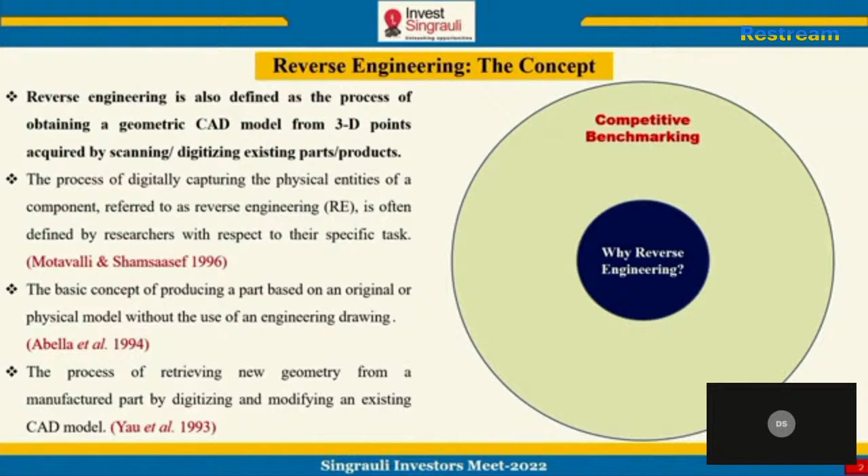So basically why we require reverse engineering? For competitive benchmarking, for a product in the market, we can provide a low-cost product in the competitive world. For smart manufacturing, which is a need of an hour - IoT-based, artificial intelligence-based manufacturing - we can use reverse engineering to achieve this smart manufacturing. Then, as all of us know, reverse engineering is for obsolete part development, design development. If the part does not exist, we can develop the design of that part if it is in front of us. Then documentation, this is very important.

I'll come to it later on also when I'll discuss the prospects of reverse engineering - design documentation. Then it can also be used for characterization of the samples. It can also be used for inspection as well as quality control. In fact, in automotive industries, people are using it largely for these activities. For product improvement, in the existing design, we can make improvement using reverse engineering.

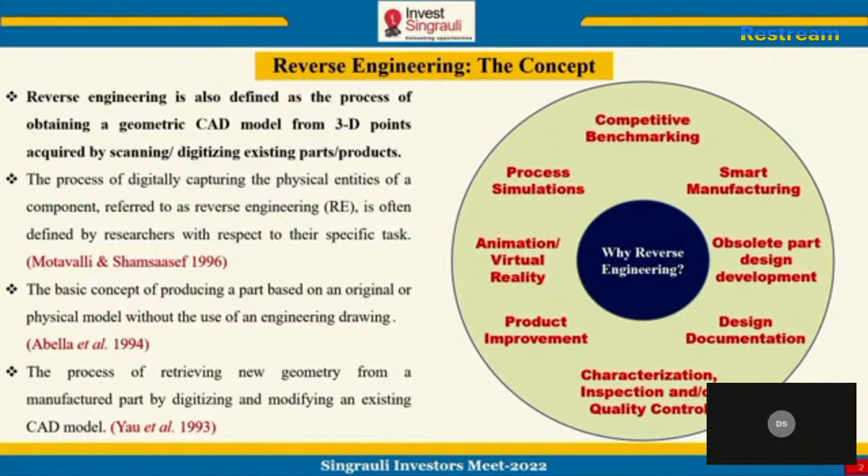For animation and virtual reality, we can use the reverse engineering designs to create the simulated environment for our engineering purposes. Like for example, in coal fields, we can develop a simulated environment of a whole coal field using reverse engineering, and we can identify the bottlenecks that we might face in the real situation. Then process simulation, like in case of biomedical industries, for a surgery, which is a very complicated task, we can use reverse engineering to simulate the complete surgery before even we perform it on a real patient. So this is where reverse engineering can help us.

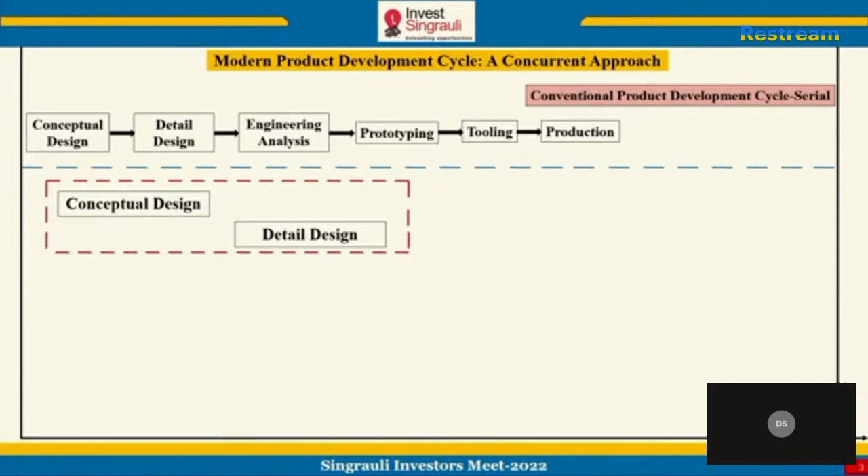So now what is the current scenario? The conventional product development cycle that we follow initiates with conceptual design. It is a serial type of thing - design, then prototyping, then manufacturing, and then if some failure occurs, we again go to conceptual designing. This no longer exists now. People are moving forward, way ahead. That is rapid product development - that means all the things that exist in the serial production cycle have to be done simultaneously or parallelly. This is known as rapid product development.

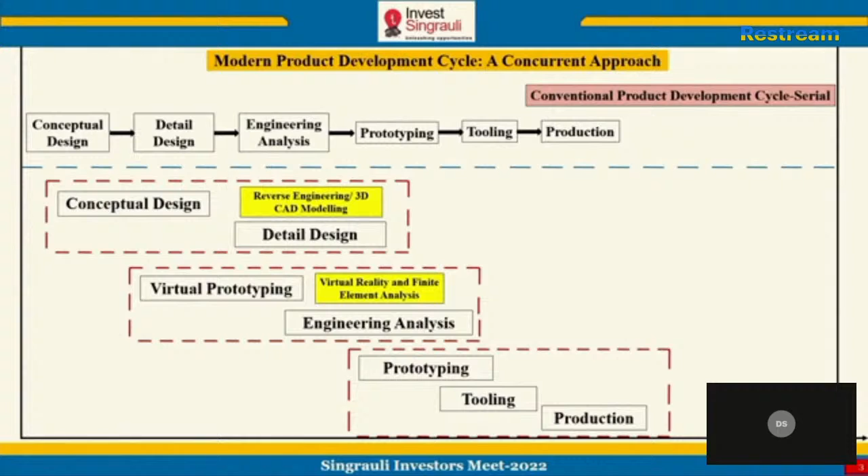So we can do designing and simultaneously we can also think of manufacturing, like using additive manufacturing technologies or 3D printers. So we can see what are the problems and identify those problems, and it results in time saving. Basically the path of product cycle using reverse engineering - as I've told you, this is the conventional way we are doing till date. Concept, then we go for manufacturing, then testing of the part, then real time testing, then results, and if the results are not as per our standards, we again go to the design phase. So it's a very time consuming task. It takes a lot of time and money is invested in this.

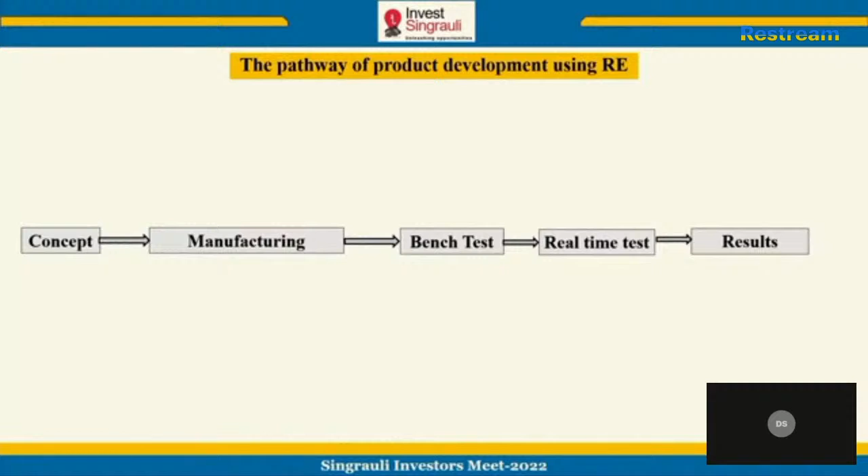To overcome this problem, reverse engineering can play a significant role. How? From the concept itself, we can go for simulation of the process. Instead of manufacturing, we can simulate the process, optimize the design, identify and analyze the results, and then we go for design loop before manufacturing.

So we are no longer spending any amount in manufacturing. Manufacturing cost is very high, and then we go for manufacturing, so the chances of failure of a product is very, very less.

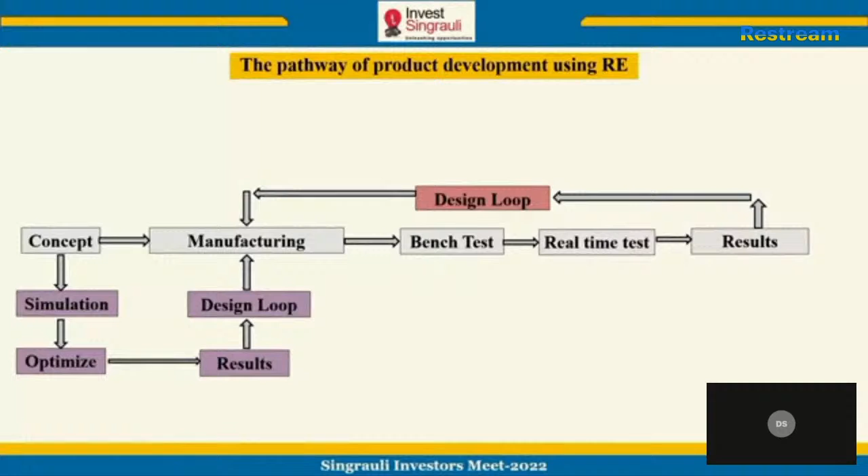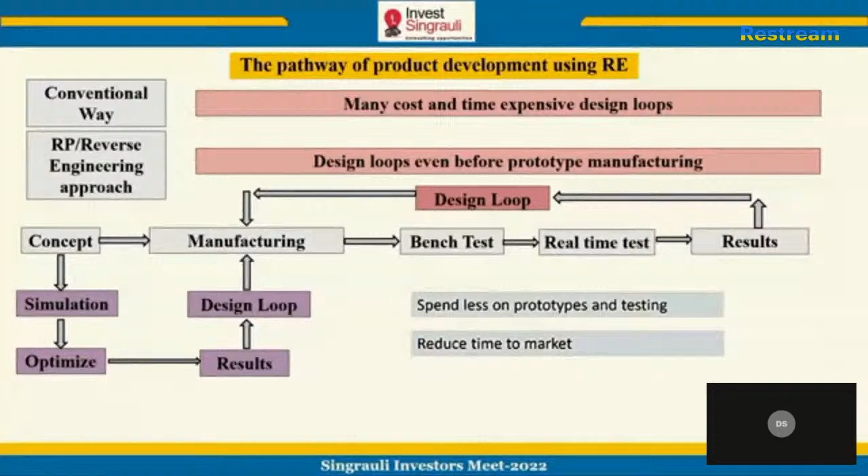So conventionally, many cost and time expensive design loops are there. In fact, in rapid prototyping or reverse engineering method, the design loops exist even before manufacturing happens. So it results in cost saving as well as time savings.

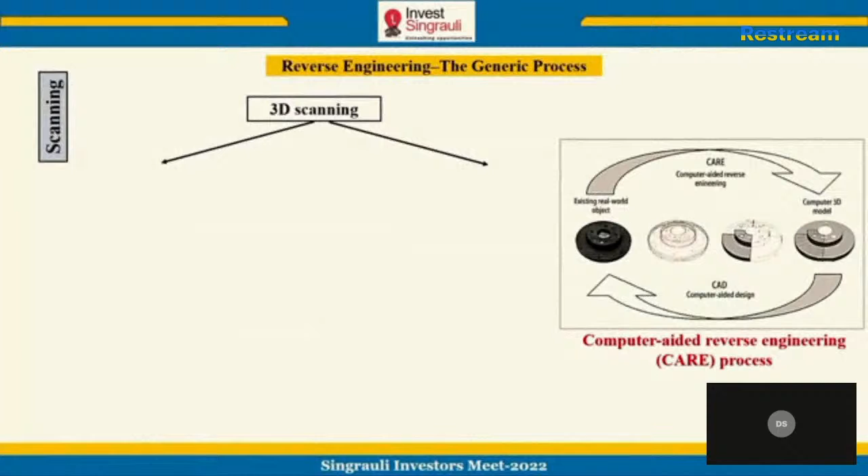Basically, I'll showcase this with the help of this slide. What is the generic process of reverse engineering? It initiates with scanning of a product. If the product is in front of me, I will scan it, like I will scan my whole body. It is possible - there are startups in India who do reverse engineering for artifacts also.

So I can reverse engineer, I can scan my body, and then I can develop the point cloud data using reverse 3D scanning or whatever methodology I can use. So I can develop point cloud data, I can process that point cloud data. The data can be in the point cloud form or it can be in the form of scans.

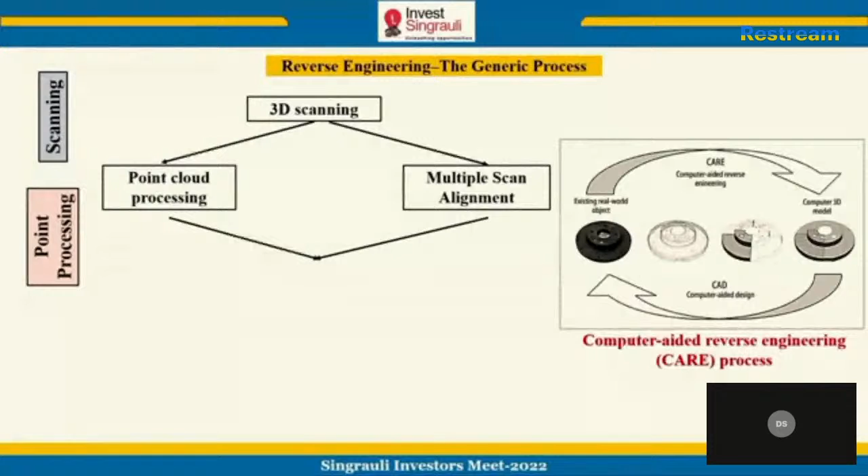We all have seen X-ray images in our life. That X-ray image is nothing but a single slice. In reverse engineering, we have multiple numbers of those X-rays, stitched together. The model is developed using a number of algorithms, so a computer science engineer is required here.

So we use the triangulation problem to develop our STL model, develop CAD-based surfaces like B-spline curves or non-uniform B-spline curves, or we can go for direct 3D printing, as well as use these for inspection also. So this is the basic generic flow cycle of a reverse engineering process.

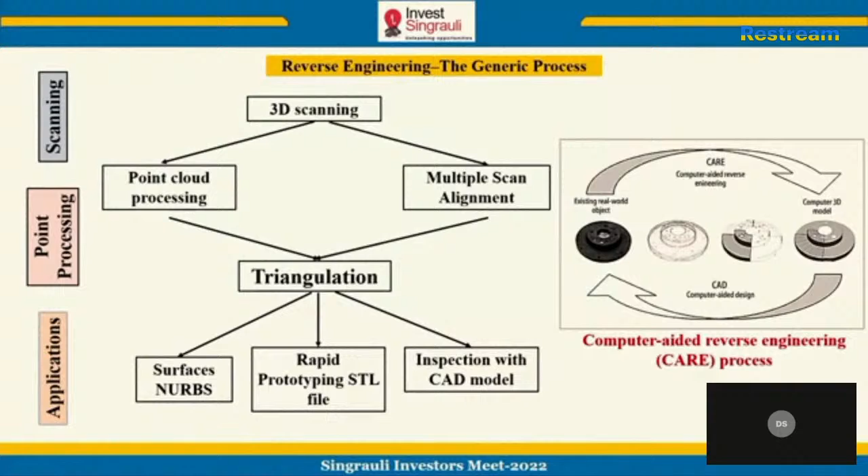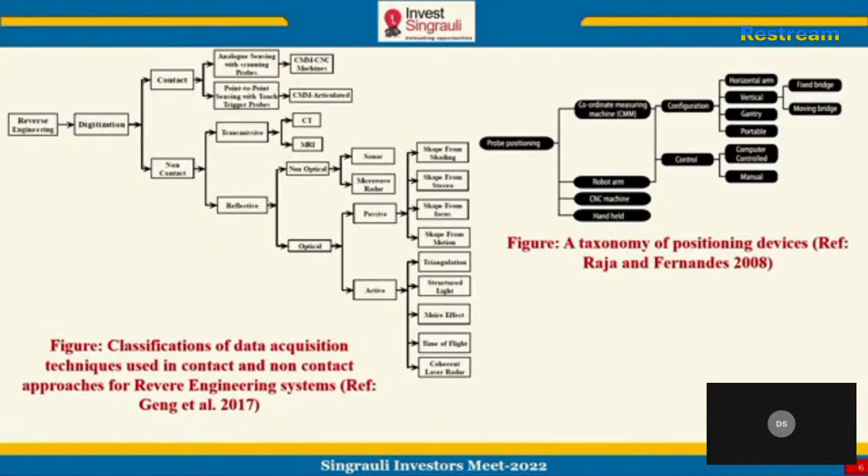Now let us understand the prospect of this technology. This is about the basics of what reverse engineering is, what it can do for us, what people are doing all over the world. Let's see that and understand the importance of this technology using some case studies.

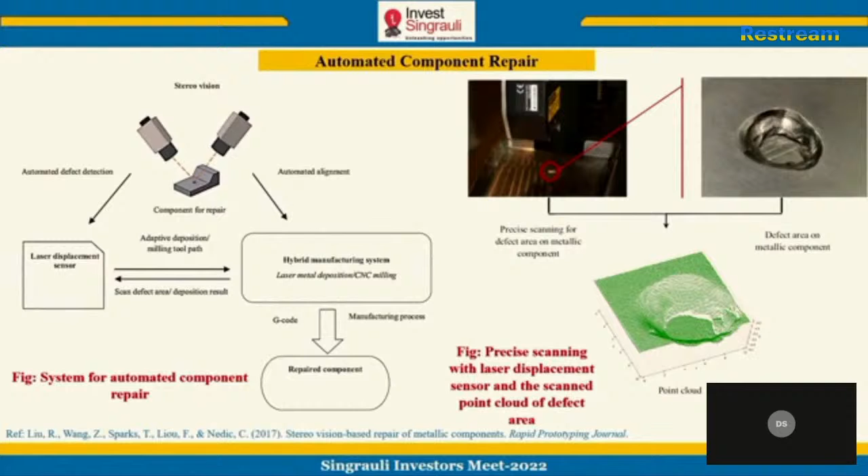We have developed the point cloud data, which is shown at the bottom right. And then we can use additive manufacturing techniques. So this is a hybrid reverse engineering and additive manufacturing machine which was developed, and then we can directly print the metal part on the same failed component. What we do currently is we replace that component.

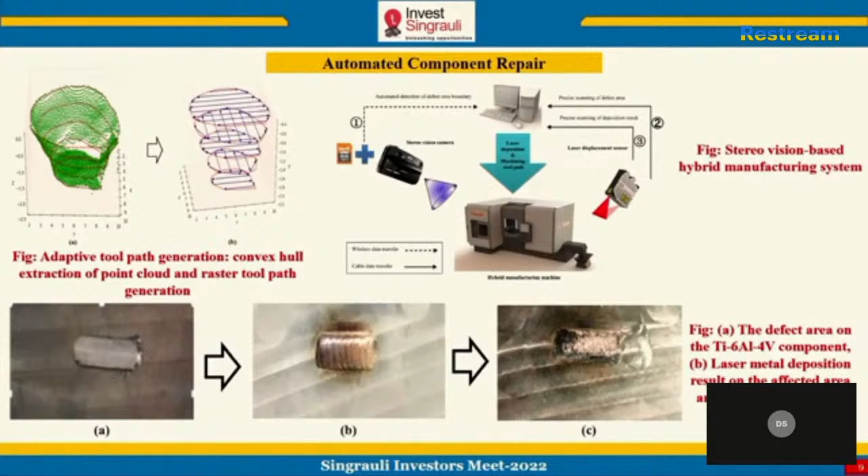No, we cannot replace it - it's very costly. What we can do is repair it. In the same part, we can do the repair, and we can utilize that component for our engineering use.

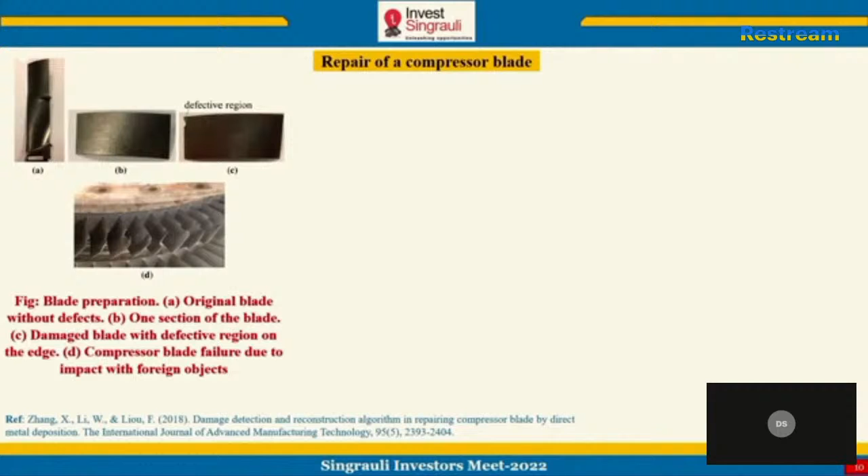Again, to see a repair, this is a case study of repair of a compressor blade. Here there is a compressor turbine blade which encountered some damage or wear and tear. You can see some wear and tear in the compressor blade component. So we do reverse engineering, we develop the point cloud data.

We process that point cloud data - you can see the damage model is shown here, some part is missing. Again, we replace this turbine or do welding and a lot of stuff. We spend a lot of time in this; our machine remains idle for a large number of days because of this.

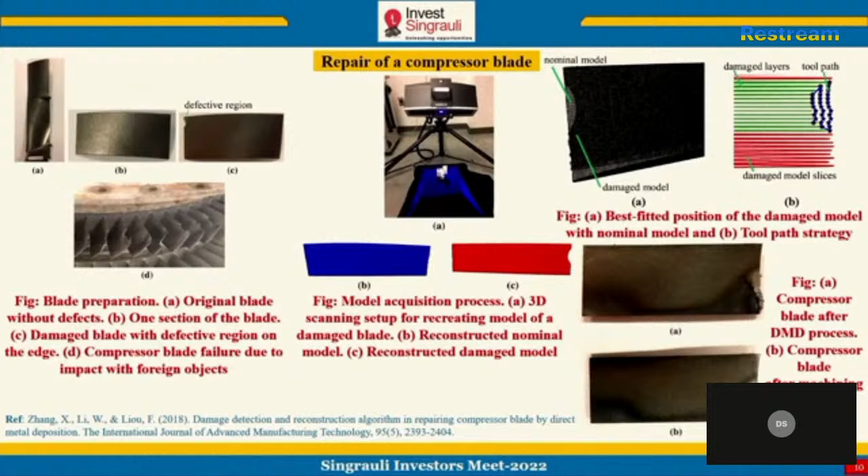What we can do is go for reverse engineering. We can develop tool paths for this, and then go for direct 3D printing, metal-based 3D printing. We have prepared the same component by 3D printing using metal-based direct energy deposition technique. We can finish it and use the same component for further use, saving time as well as cost.

Again, replacement of a failed part - this is a gasket which has failed in some engineering operation. So we go for replacement of these gaskets. These small components cost us a lot of money and time.

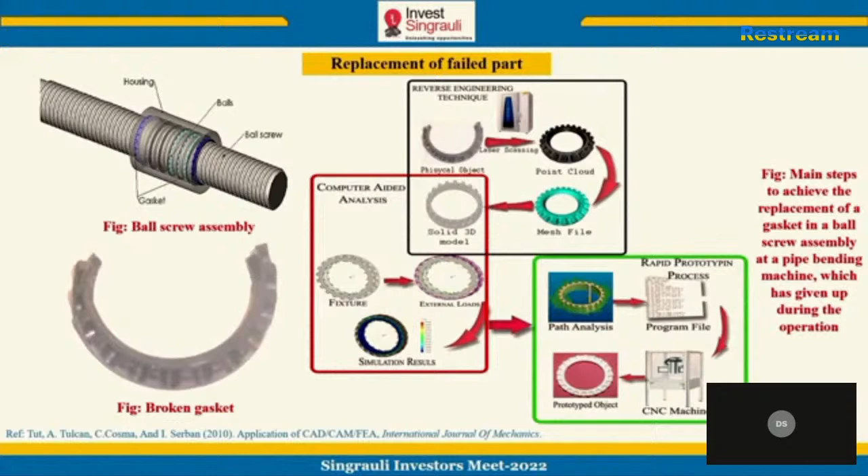So what we can do is reverse engineer this gasket. Some part of this gasket is completely missing, so we can extrapolate the existing design to develop the complete CAD model. This CAD model can be printed or machined using CNC machines by developing the tool paths, and we can have a gasket with us for engineering application.

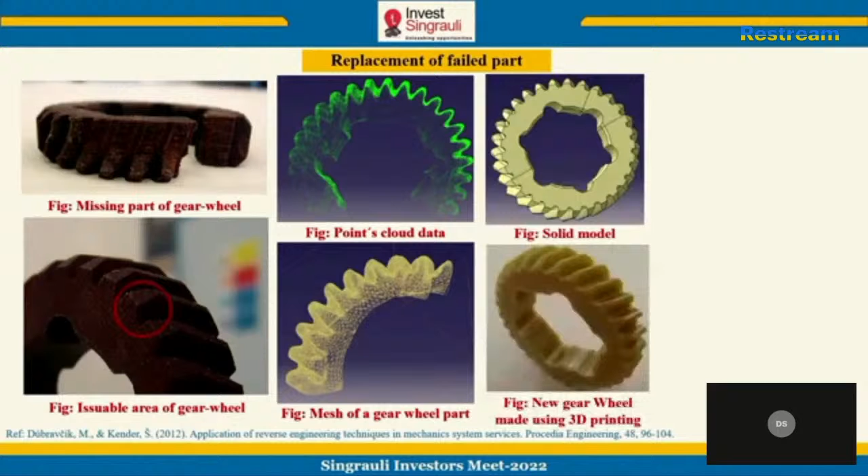Again, replacement of a failed part. This is a gear which failed during some engineering operation. This is the process of reverse engineering: point cloud generation, mesh generation, solid model development, and 3D printed part - the gear that was re-engineered. Finally, we used this 3D printed gear, obtained using the reverse engineering model, in an engineering application.

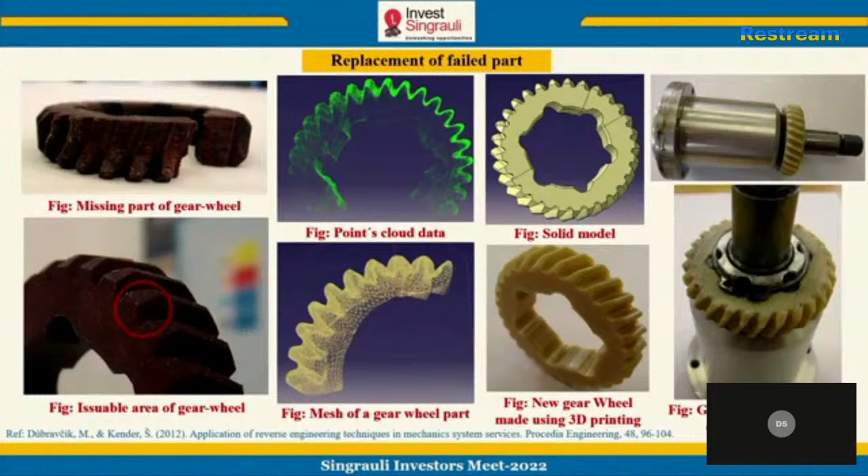This is all what people believe reverse engineering helps with, like repair. No, it can do a lot more than this. It can also develop a customized product for us.

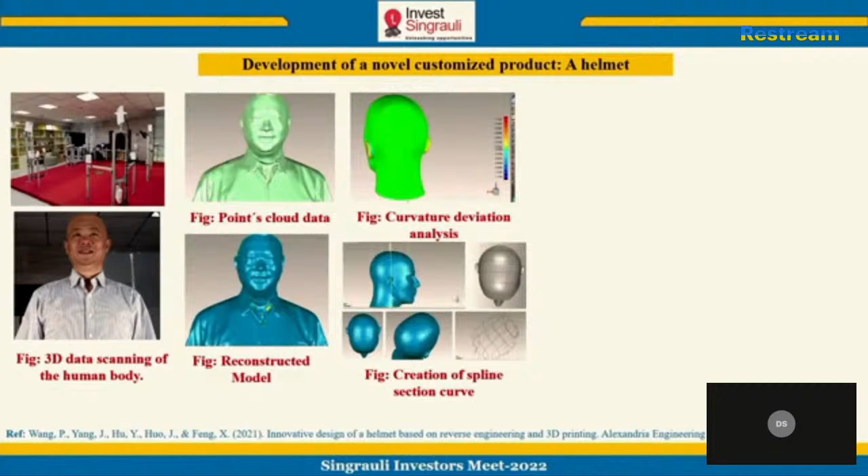How can it develop a customized product? This is a case study where a helmet has to be designed based on the structure of the human body - a customized helmet which will fit exactly to the size of the human head. So in reverse engineering, you can see the steps involved, the point cloud and all those things. The curvature has been modeled using reverse engineering, and then we use CAD model development software to design the helmet. This helmet has been fabricated. This is a customized helmet, and you can make improvements, add accessories like cameras to it. So this is reverse engineering for customized part development or new product development.

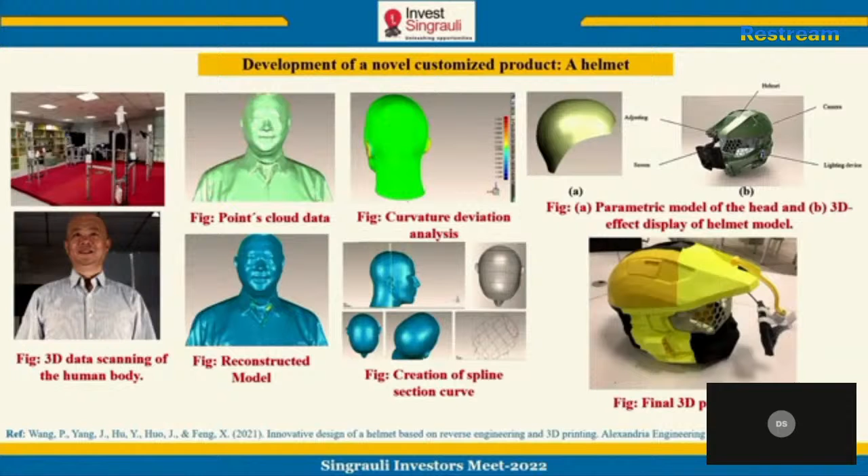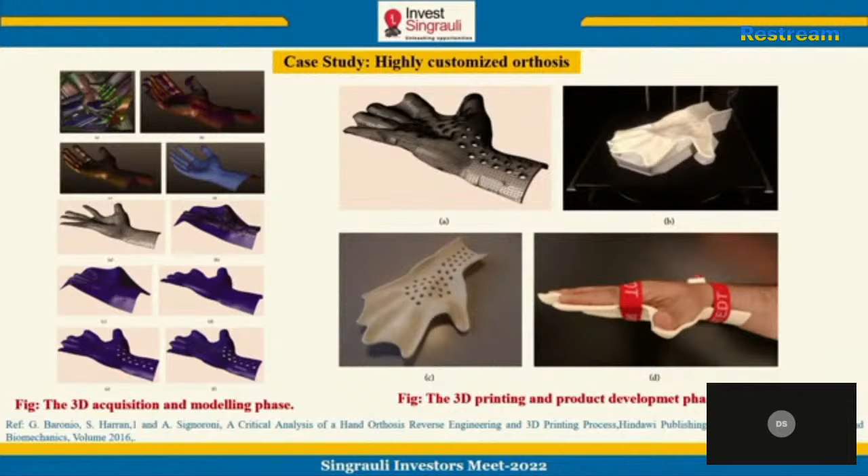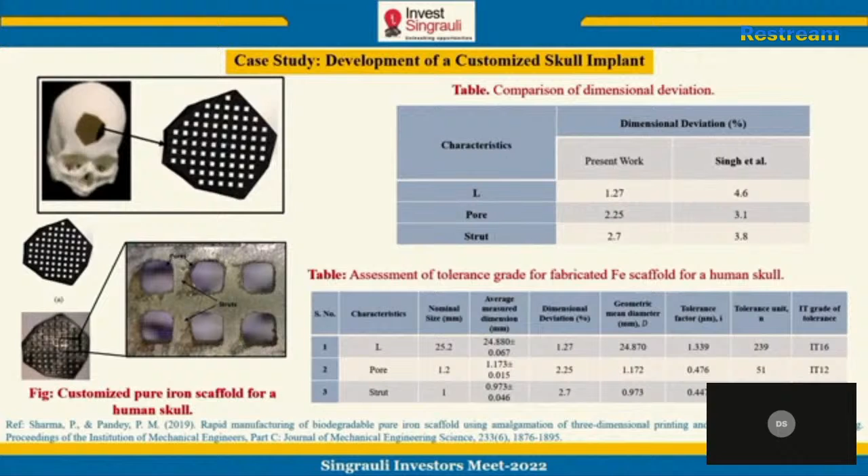So you can imagine, this is a biomedical study, but you can always implement it for your own applications. That's why I have included these case studies.

It can also be used for morphological characterization of components which are very difficult to characterize, for example casting products - there are a lot of defects in casting products. The automobile industry uses reverse engineering to identify porosity and micro cracks. This is a metal foam component, considered to be a very complex shape, and you're asked to get the volume of this fabricated sample.

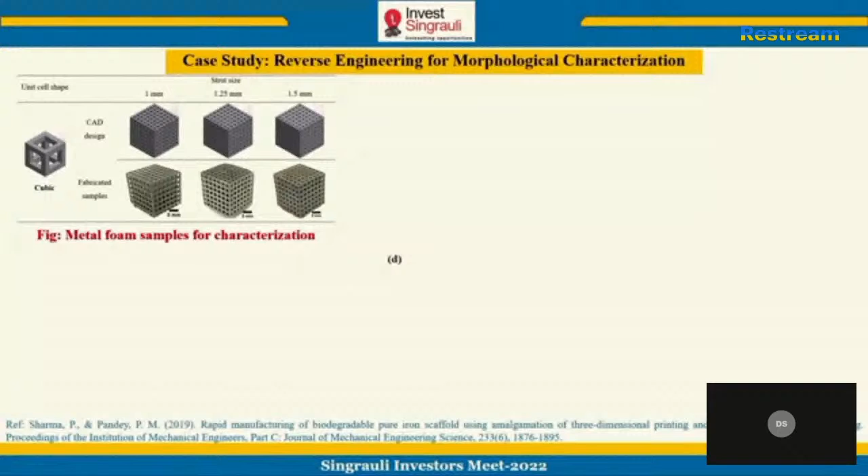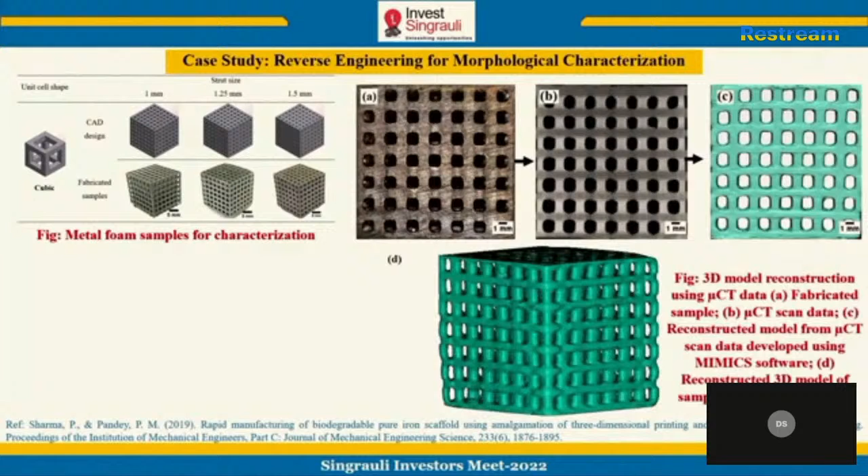It is very difficult to obtain the actual volume. We can always say this is the ideal volume, but the actual volume, if I want, I cannot get from any characterization method. But using reverse engineering methods - like for this metal component, a CT scan image, X-ray image, and then the reconstructed model - we can get the porosity in the component, identify the volume of the component, the surface area, and the actual size.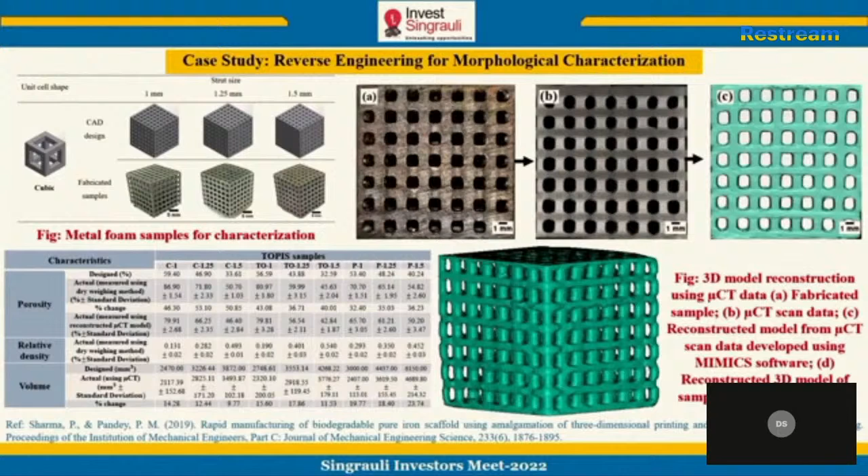In fact, we can use this CAD model for finite element analysis directly. It will give much more reliable results as compared to the ideal CAD models that we develop for FEM. Generally what we do is develop ideal CAD models, so they will give results, but that will not be close to reality. But if we are using the reverse engineering CAD model, they can give us ideal results.

So what are the opportunities and what are the challenges in this? Some challenges in various engineering fields: first is very higher lead time for parts, requirements of inventories, and high downtime due to difficulties in procurement of spare parts. Machines remain idle for 10, 15 months, and those machines are very cost expensive.

Then there is difficulty in the improvement of existing designs or existing machinery. We are using old machines and their efficacy is very low, so how can we improve it? These are the challenges. And then there is a huge lack of skill set in the reverse engineering field currently in India. So what are the solutions?

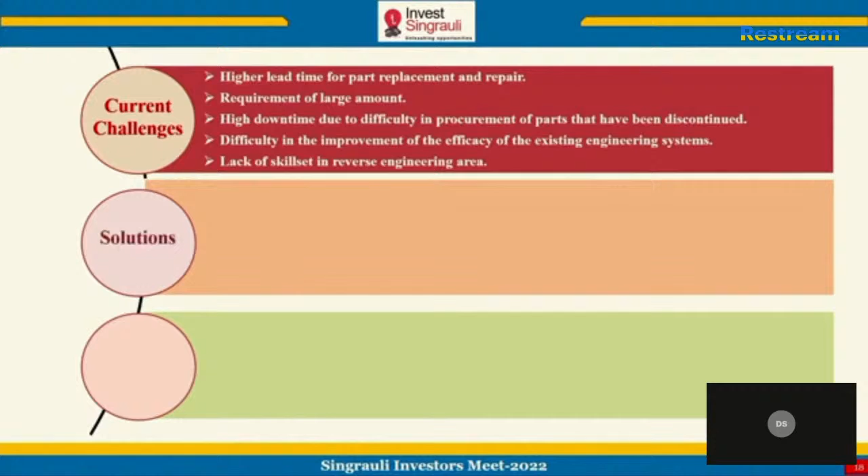Development of digital inventory. This is one word which is very powerful, and I am very much sure that this will change the scenario of the engineering field in the coming future. Instead of maintaining the whole physical inventory, we can have a digital inventory of our parts. Instead of having 500 or 1000 crores of physical inventory, we have only CAD models of our parts.

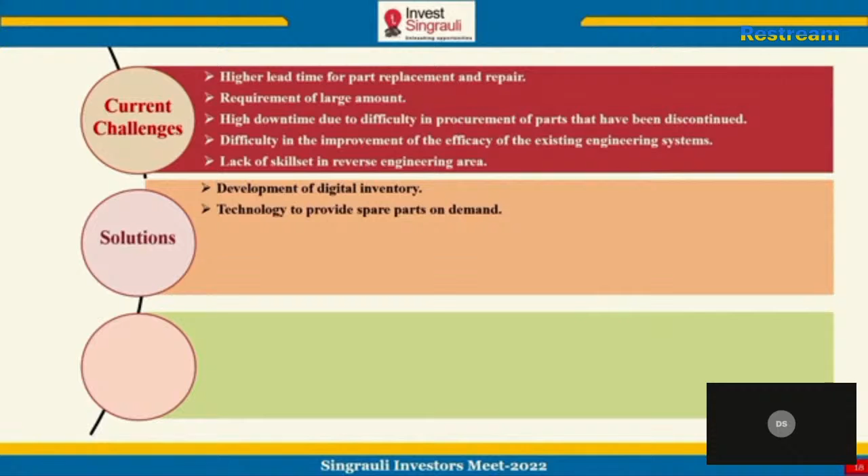And those CAD models, on demand, we can print or fabricate. So we are no longer handling large amounts of inventory. This is the requirement of digital inventory and technology to provide spare parts on demand, like 3D printing, additive manufacturing, or 5-axis CNC machines or 10-axis CNC machines, large scale machines. Then there's the ability to achieve custom modification, as I've showcased you, custom part modification can be achieved.

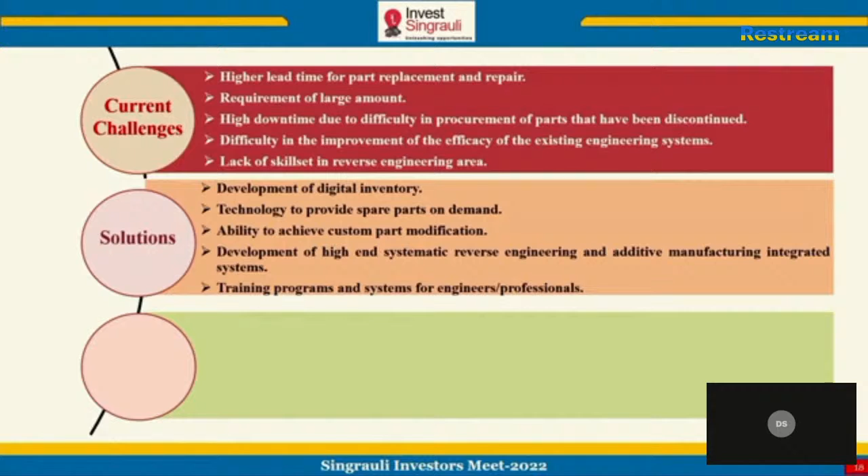Then development of a high-end systematic reverse engineering solution with integration with additive manufacturing techniques. It will help us achieve these challenges easily if we have a systematic, integrated product development process using reverse engineering and 3D printing. And then we want training programs so that our engineers get trained in this field.

So technologies which are commonly used to achieve these challenges are 3D scanning machines, CMM machines, CT scan, MRI machines, additive manufacturing systems, CNC machine systems, and software and algorithms. There are softwares like Mimics, Polyworks, which work perfectly for these types of techniques.

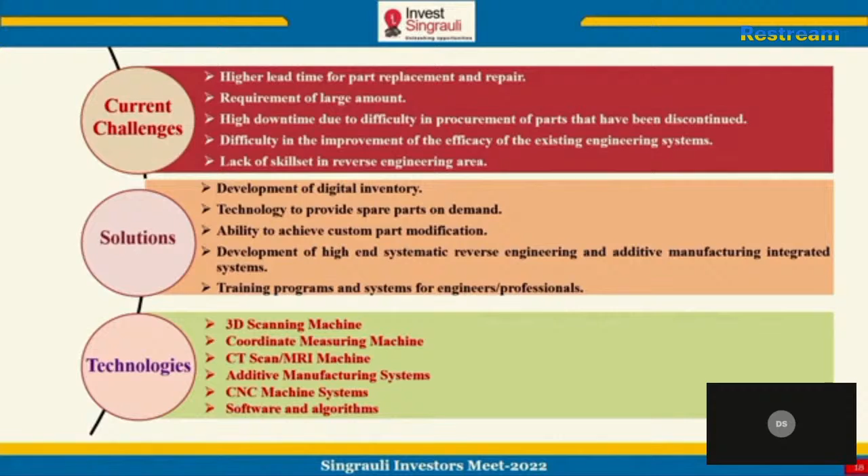Now let us think about what are the business opportunities in this area. The business opportunity which lies is we want a center for reverse engineering, at least in India. At least in a location such as Singrauli, it will help different industries a lot.

What this center can do for us is give us a digital inventory. It can not only give us digital inventory, but it can also provide support to local vendors. Then training, as I told you, local vendor training, their certification. We train the small industries in the area of reverse engineering. We can provide the facilities for reverse engineering to local vendors.

Advanced designing - we can develop complex shapes, and we can improve the design also. Then research and development. This is very important because the reverse engineering area is still in a development phase, so R&D becomes very important in this area. And R&D can be specific to an application, or it can be general also.

Then rapid manufacturing of a product. As I've told you, integration of reverse engineering with additive manufacturing or CNC technologies can result in rapid manufacturing of a product, so we can provide spare parts on demand. And then certification and testing.

This is what we are lacking. We don't have enough certification standards or testing standards for reverse engineered products. So we need to establish a center which can provide such things.